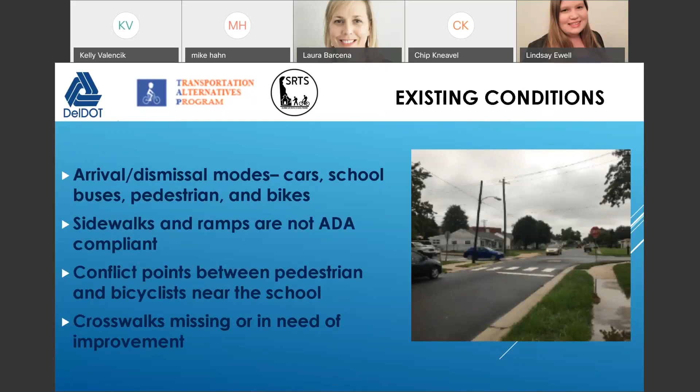Very similar to Eisenberg, we've got arrival and dismissal modes of cars, school buses, bikes, and pedestrians all coming in on one road. So we're taking a look at the sidewalks and ramps that are not ADA compliant along the most traveled parts of the route for the children, and looking at the conflict points between pedestrians, bicyclists, and vehicles near the school, and of course crosswalks that are missing or in need of improvement.

So I'm going to go back and forth between these two slides here, but primary focus is going to be on these four intersections.

Chase and Winder, we're actually going to be rebuilding crosswalks and the crosswalk and curb ramps here on the left side of the intersection, so that pedestrians coming in will be here because they come up the sidewalk and into the school. Right now there's a crosswalk here, but it's not really being utilized because of all the traffic during arrival and dismissal going through the intersection. The kids are just crossing here anyway. So we want to provide an actual crosswalk to make sure that everybody knows that that's an appropriate place to cross and that the cars are aware that children could be crossing there.

Halcyon and Chase Avenue. We're also looking at crosswalk and curb upgrades here and at this intersection, Halcyon and Chase. So we'd have a crosswalk across Chase and across Halcyon. And then at Lind Avenue, we've got some curb ramp upgrades to do as well.

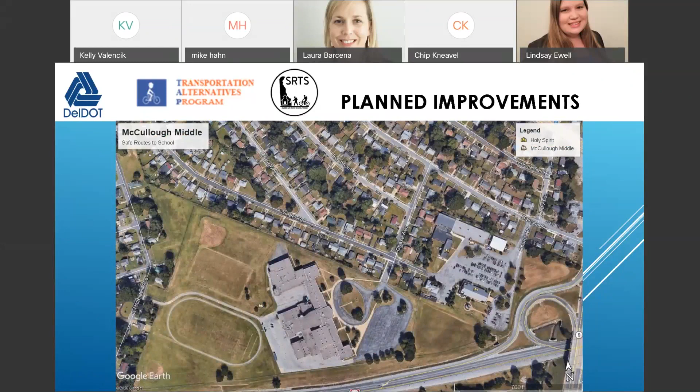That's essentially it. I wanted to make it quick, throw everything out there, and then leave plenty of time for questions if you have any. If you don't have it right now, but maybe you think of something later, this is my email and my phone number. Feel free to drop me an email or a call with any questions. Of course, you can always reach out to community relations. But if anybody has anything right this minute, we can take it in the chat box on the WebEx. And thank you.

All right, so thank you so much, Chip, for that presentation. I am looking at the chat box right now, and I don't see any questions right away, so we'll give a few minutes if you guys think of anything. Yep, I don't see anything right now. So, Chip, feel free to add in anything if you think of something, or we will just let it stay open.

Schedule-wise, I think we'd be looking at construction next construction season, spring, summer.

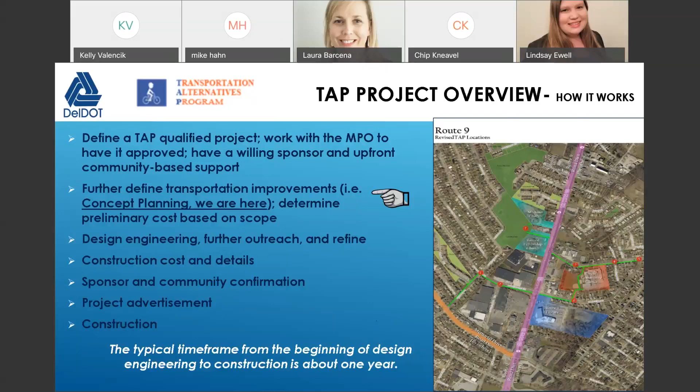So under design and sponsorship confirmation, there's project advertisement and ultimately construction. At the very end, typically this is going to take about a year, maybe a little more based on the timing right now and the conditions with COVID. Our TAP projects like this, which have three locations, design, confirmation, sponsorship, back and forth, community outreach, it's about a year, maybe a little more for everything from planning to construction, and then ultimately it's finished. Then maybe we go with another project.

Alright, so again, just to make sure the folks out there know exactly where they're at geographically, we need to have a location map. So I've provided a location map. Route 9, or New Castle Avenue, is basically in the middle of your screen.

Morehouse Drive, which is basically one side of the TAP project, is right here. We've got the restaurant store. Folks can see my arrow, I'm moving it around on the north end of Morehouse. The Bowlerama and Bowlerama businesses are on the south end with Bowlerama Drive. Try saying that ten times.

Basically in the middle of the screen, the Route 9 library is on the right-hand side. This is a little bit older aerial photograph, so we know that the Route 9 library has been open for quite some time. The Rose Hill Community Center is on the upper right-hand side, with Hillview Avenue right below my arrow. We've got Memorial Drive on the left-hand side, and there's Bizarre, which then forms into Anderson, so it's Bizarre and a little bit of Anderson, because it migrates at the intersection there.

Morehouse Drive and Hillview Avenue is our TAP project for streetscapes.

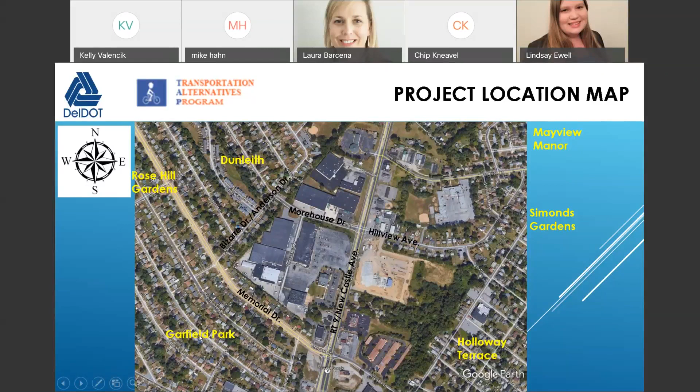So project purpose. We have this TAP project, but how did it originate? It actually originates through the great efforts of the Route 9 Corridor Master Plan established by WILMAPCO and New Castle County when they undertook a land use and transportation master plan. Part of that identified a trails and path plan, which originated from a Route 9 walkable community workshop. The TAP project evolved out of the Route 9 Land Use and Transportation Master Plan as a component within the trails and pathways. That's what's really important.

Within the area, and a lot of folks probably already know this: provide pedestrian safety and livability improvement for all users, remove barriers to pedestrian and bike access where appropriate, and enhance access to nearby community facilities like libraries, parks, religious institutions, community services, jobs, and other neighborhoods.

Our effort with the TAP is to provide safe, accessible transportation improvements or upgrades within the area for whatever it is—residential, jobs, walkability, transit, whatever it may be. Another project purpose is compliance with the Americans with Disabilities Act and its design guidelines. We'll get into pictures in a second, but if you know the conditions, there's missing gaps that aren't ADA compliant, or curb ramps are broken, or sidewalks are deteriorated. Those things are incompatible with the project purpose as well as the ADA Act.

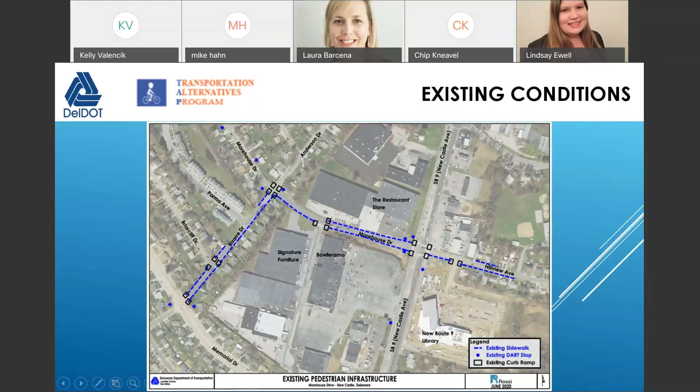We took a couple pictures out in the field. Notice right here, if you're following my arrow, the sidewalk is here. This is Route 9, we're at Morehouse Drive, but there's what we always call in planner's terms a goat path. We know there's frequent use of not necessarily going around the corner, but using a straight line. There's potential opportunity there to enhance that area.

On the opposite side, where Bowlerama is, is our Dunleith entrance sign. You can notice some of the cattails or phragmites with the drainage swale. There's no landscaping - just to let folks know, there's always a maintenance issue when it comes to landscaping. But the sign is there - could it be enhanced to serve as a gateway? Those are some ideas.

Again, following Morehouse, this is looking towards Route 9. This is a little bit further away. Where my arrow is, if you can see me, that's where the Dunleith sign is. So I just stood back maybe about 850 feet or so from the area. You notice the school buses too.

This is kind of a cartway. You have a separate right-hand turn to get southbound on Route 9, and then there's a shared through and left lane for where the school buses are. There are also some trucks beyond the school buses because of the Bowlerama Drive and the restaurant store, so there's a bunch of deliveries going on. There's the DART route and obviously school buses.

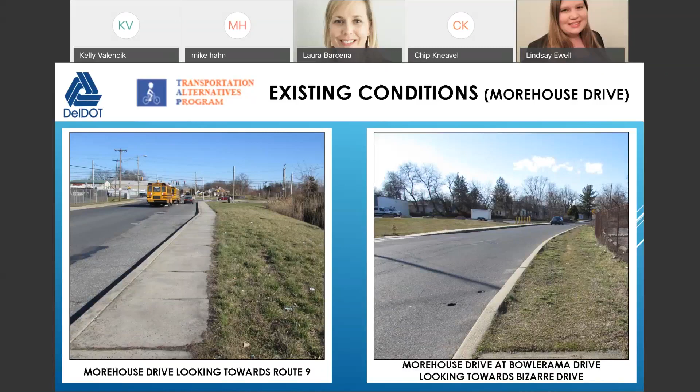That's looking towards Bizarre Drive, just the existing site conditions. So then we went from Morehouse Drive to Bizarre. This is the area where there is some missing sidewalk, or the sidewalk turns into like 3 or 4 feet at these locations. So we have Bizarre Drive between Morehouse and Parma Avenue, which is where the housing development is that - I forgot it already, I had it written down.

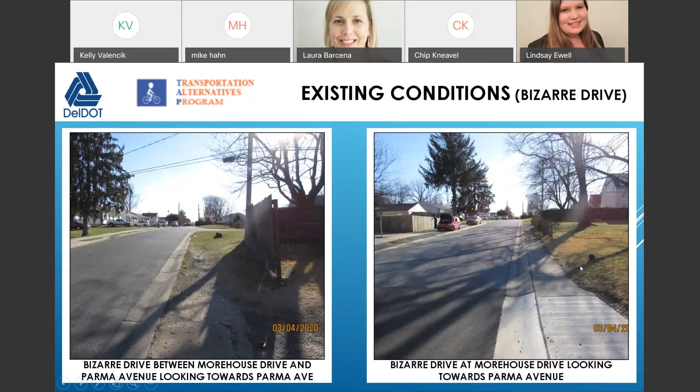But anyway, it lacks a sidewalk, and this continues further up from Parma Avenue, almost looking at - not Morehouse, no, Memorial Drive, I'm sorry. Yeah, Memorial Drive. This is looking into Memorial Drive in the background. Again, this is a sidewalk as it narrows down, so you're almost at the housing development that doesn't have sidewalk, which I'll look up the name in a second, unless someone wants to type it in the chat box.

So again, this is Bizarre Drive and Parma Avenue and Briarcliff looking towards Parma Avenue. Again, there's a missing sidewalk link. And then this is from Memorial Drive looking into Bizarre Drive, towards Briarcliff. But you notice the sidewalk there is not in very good shape. The grades have changed, and there's standing mud or leaves out there.

We do have some good signs out there. Obviously we've got a school sign, or at least kids playing as you approach the neighborhood. Speed limit's 25, which is supposed to be low, whether or not everyone follows that is another thing. And then obviously trucks over 5,000 pounds are restricted except local service. That's also on Morehouse too. So some of the signing is not too bad, at least it's there, but the sidewalk conditions are not necessarily there.

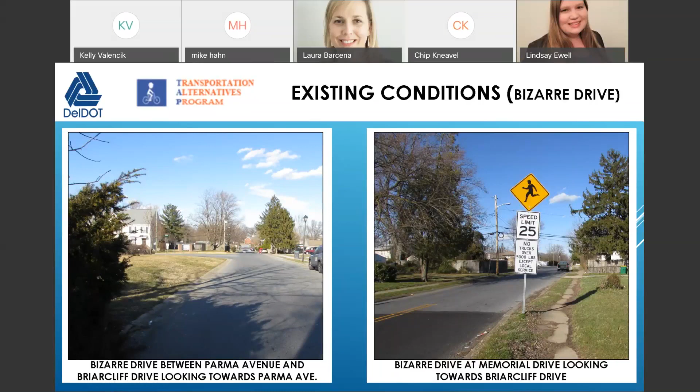So let me jump over to Hillview Avenue between the Rose Hill Community Center and the library. There's not much there to provide the cross access between the two major community areas. The sidewalks are in poor shape, they're substandard, and there really isn't any crossing towards things. So just to let folks know the existing conditions on Hillview.

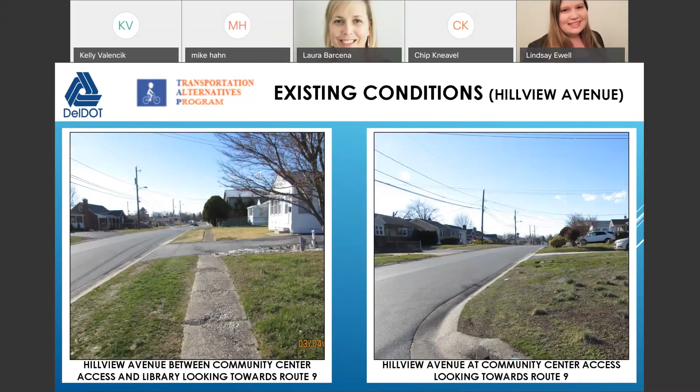One more picture there. So this is approaching Route 9 on the left-hand side, Hillview Avenue. This is almost where the library is, or at least across the street. And then looking back towards 6th Street on Hillview Avenue from the library, there's not a particular crossing there between the two major community centers. So again, some of the proposed improvements are looking at ways to provide that access or improve it.

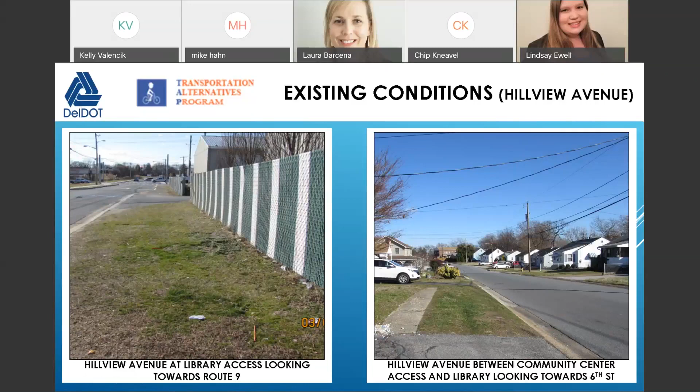So I will turn it over to Laura and Lindsay from the Rossi Group, and they will go into some of the ideas or concepts of what we proposed for the TAP project, based on looking at the existing conditions. Thanks, so I'll turn it over to them.

Okay, thanks Mike. So hi, I'm Lindsay Ewell, I'm a junior traffic engineer with Rossi Group. So I want to talk to you a little bit about some of the potential improvements that could be used to achieve some of the goals of this project.

As Mike said, we are looking to enhance pedestrian access and connectivity and improve pedestrian and bicycle facilities. Some proposed improvements include replacing or installing new sidewalk along Bizarre Drive in areas where there are gaps currently, and also between Memorial Drive and Morehouse Drive. Also replacing sidewalk along Hillview Avenue, along the eastbound lanes east of the library entrance, leading up to the Rose Hill Community Center. Replacing existing sidewalk curb ramps where they are not ADA compliant.

Potentially adding bike facility markings or sharrows along Morehouse Drive. There's a picture of a sharrow here. And we're also looking at potentially striping crosswalks located within the project limits between either current or proposed curb ramps, just to draw more attention to places where pedestrians will be crossing. And as Mike mentioned, also looking at landscaping Morehouse Drive to enhance the entrance into the community, which would then require a maintenance agreement and sponsor.

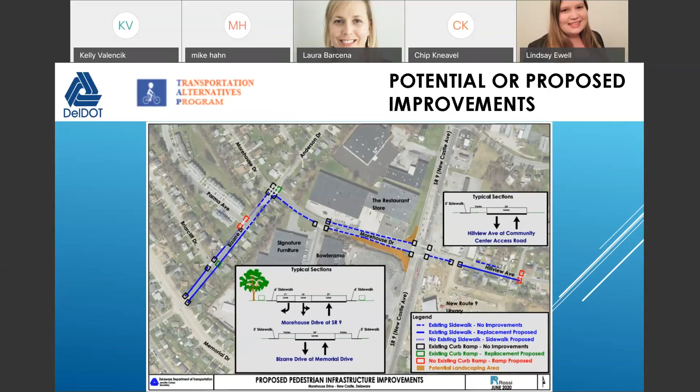Did we lose Lindsay or not? Hello? Yeah, okay. Was that, you couldn't hear me? Yep, just for a second. I'm sorry, maybe the audience didn't hear. Oh, we didn't, sorry. Yep, sorry. I thought I took it off mute. No, this is Laura Barcena.

So one thing I want to touch on real quick at the concept development phase is we basically take a look at what's out there, try to determine what the deficiencies are, where there are gaps, where the sidewalk might not be wide enough, and then start from there with determining what the proposed improvements may need to be for the project. So what we're going to do in these next few slides is give you an idea of what some of these improvements may end up looking like.